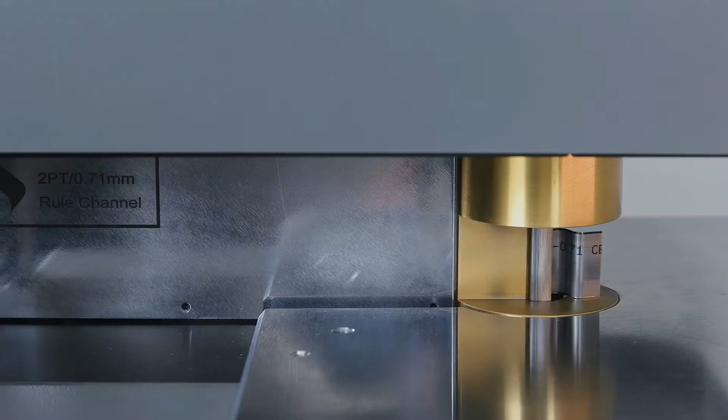SDS has been a leader and innovator since its introduction of the world's first fully automatic rule bender in 1997. The Easy Bender series has been the number one selling bender and has become a standard in the die making industry.

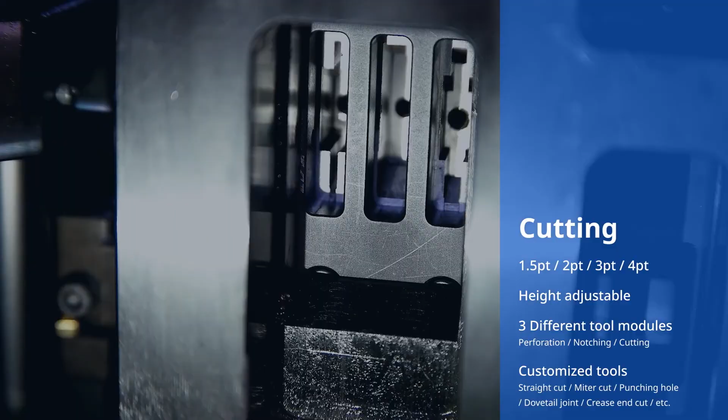With a servo-driven cutting unit, different height rules can be run throughout one tool module set by changing the shims located under the tool modules.

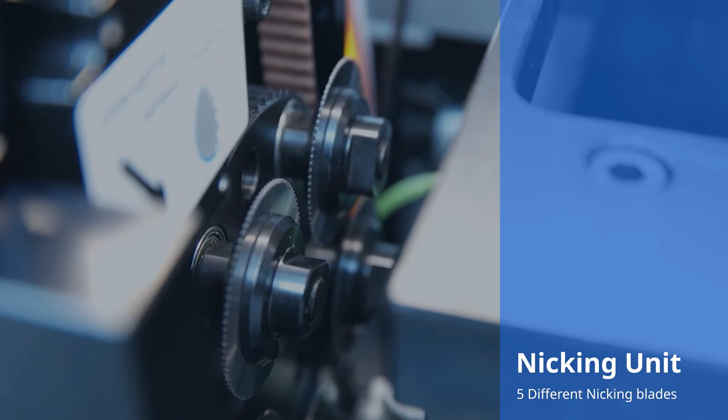Sophisticated jobs with many different sizes of nicks on a die board can be accomplished without replacing the nicking blades in the middle of jobs. Software-controlled nicking width and depth allows for multiple nick widths during the same job.

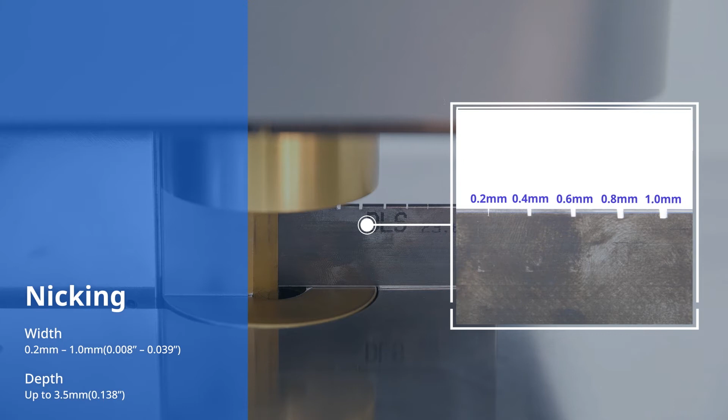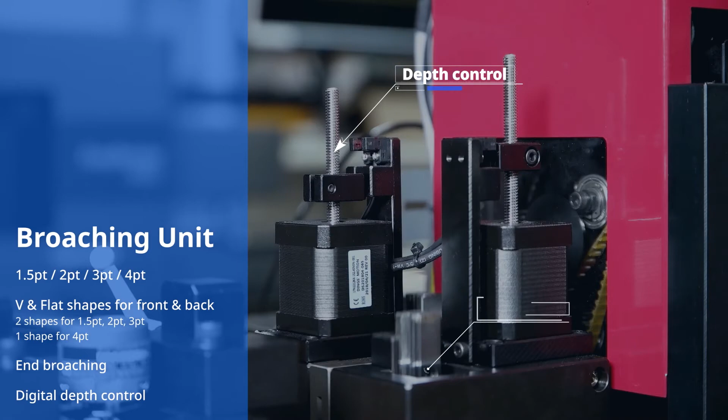The broaching unit, used for sharper bends and miterless joints, comes with V and flat shape, both front and back of rule. With its digitally controlled depths, die makers are able to make better dies in less time.

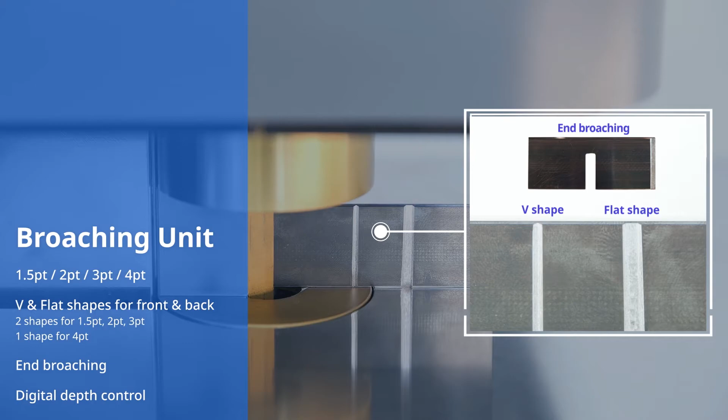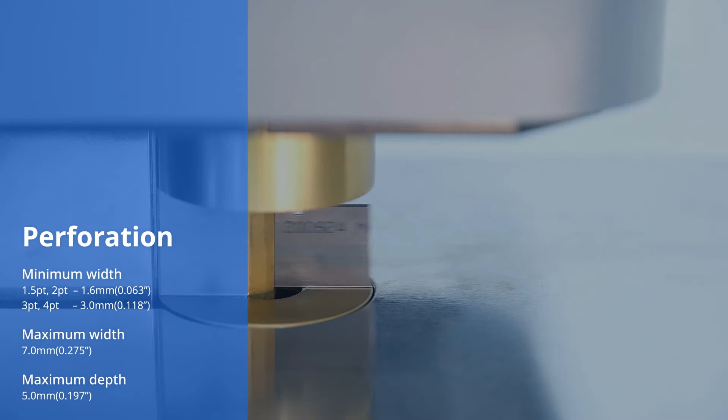Custom perforation comes with 3 different sizes in a standard tool module, eliminating the costly need to purchase in-stock boxes of pre-made perf rules.

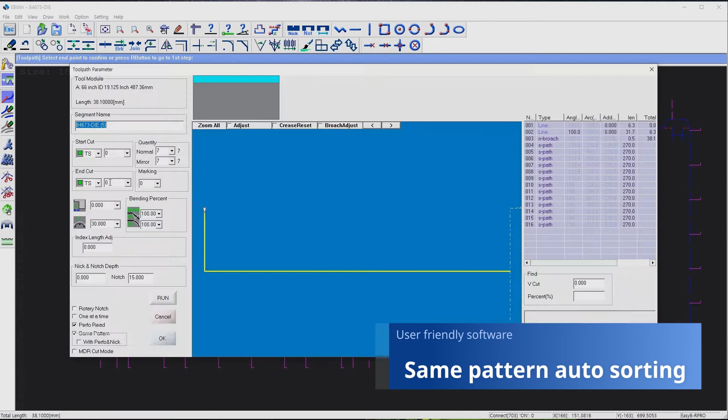Using a graphical simulation, operators can identify challenging segments and make adjustments before processing pieces. Auto-detection of same shapes throughout a CAD file eliminates the need of counting the total number of the same pieces.

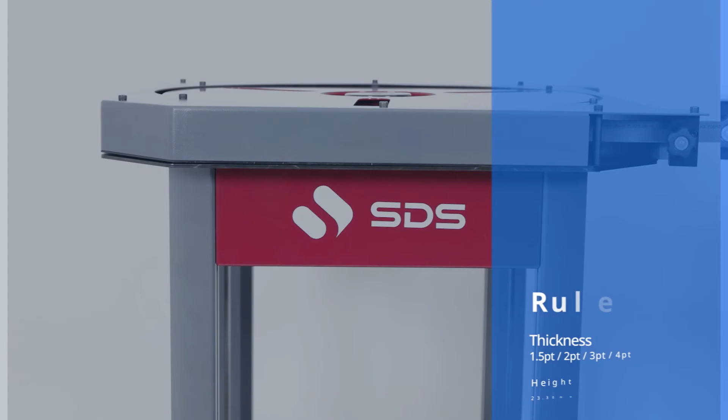NS2 can handle up to 4-point thickness of cutting and creasing rule. Center, side, and serrated rules up to 51 millimeters can be processed.

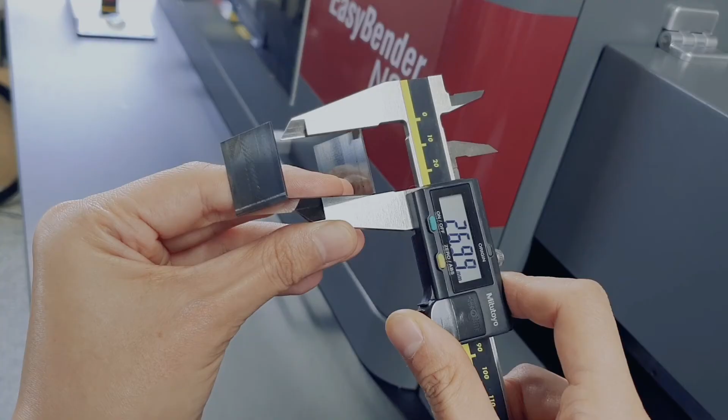NS2 produces consistent pieces while saving valuable time and reducing cost. NS2 is suitable for folding carton, corrugated carton, and a wide range of applications such as gaskets, blister packs, and labels.

Trusted for over 30 years by thousands of die makers worldwide.